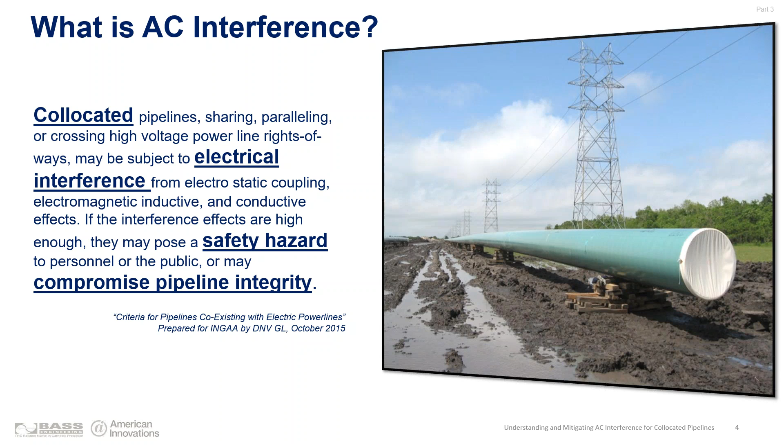Session one earlier defined specifically 3 types of AC interference. Capacitive AC interference - this is the effect of an isolated pipeline sitting on a wooden skid during construction, where the metal in the pipeline becomes a conductor and you've got charge voltage being generated on the pipeline. Your construction guys, your welders, know how to handle that. You take a piece of rebar, drive it into the ground, take your jumper cables, connect the rebar to the pipeline, and that bleeds the energy off of the pipe, making it safe to go about your construction and welding during commissioning of the pipe.

The second type of AC interference was resistive coupling, or resistive interference. It's an intermittent threat. It occurs when there's a fault on the power line - an abnormal or unexpected fault condition releasing energy into the environment. Typically this happens with a 60 hertz fault event or a lightning event. That energy travels along the power line down to the guy wires, into the ground, and can effectively damage your pipeline. If you also happen to be touching the above-ground appurtenances or the pipeline at that time, you get the hazard of step potential, touch potential, and the threat of that energy traversing through your body, causing injury or even death. So that's resistive and capacitive coupling.

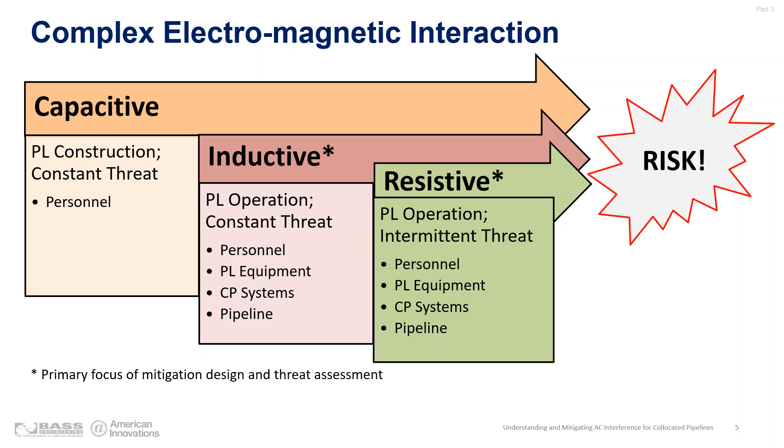And then the third type of AC interference was inductive. I'm going to hold off on this one a little bit because we're going to talk about it in great detail - inductive coupling. We're going to use this as an example for walking through our risk assessment. So session one gave a definition of AC interference and identified 3 types of AC interference.

And then happily, about a year ago, late last year, NACE came out with a standard, SP 21424, which gave our guys out in the field some guidance on standard practices and how to implement an effective AC monitoring program. And I say happily because it corroborated a solution that we, American Innovations and Bass Engineering, have been promoting for a couple of years prior to the release of that recommended standard practice.

We're really happy to see this come out in a formal recommendation from an organization like NACE. In effect, what NACE is telling you that you need to do is 4 steps, 4 high-level steps. First, you need to do an analysis, which is the equivalent of a risk assessment of all of your assets. This is to help you understand where along your pipeline you have the potential for AC interference, where all the right conditions and the confluence of events and circumstances come together to introduce AC interference along your pipeline.

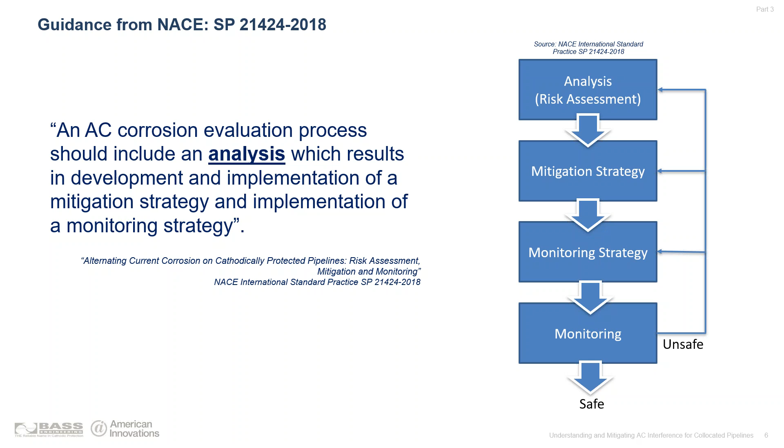So with that, let's take a break and let's do a poll real quick. Give me a second here as I navigate to the poll. And I'm going to ask you, does your company presently have a formal risk-based AC interference monitoring program?

And as people are responding, answers are coming in, if we're going to do a risk-based inspection, let's ask this question: what is risk? Risk, if you ask my 17-year-old son, he'll tell you it's the likelihood of him not getting his allowance for the year. And I'll tell him his mitigation activity is if you come in within your curfew, you get your allowance. The point of that little story is that if you ask different people, you'll get a different answer for what the definition of risk is. They generally understand that it's some kind of a loss or something bad that's happening, but you get a different answer.

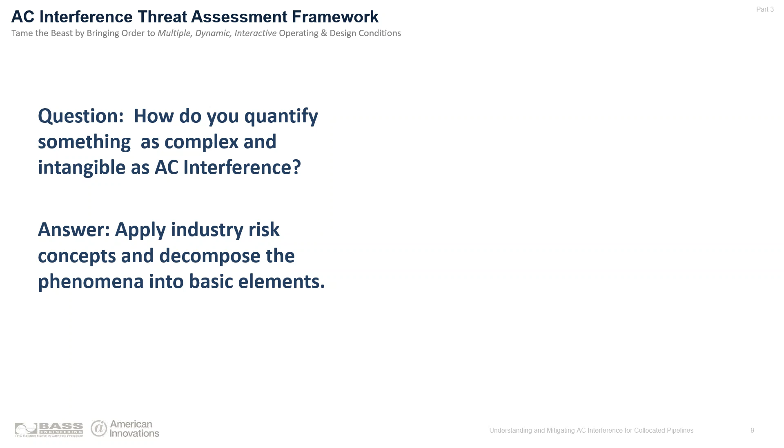So to do that, we developed a framework that allows us to basically categorize all the different components of our threat. At the highest level, we think of a threat. And we define the threat as an indication of something that is impending. In ACI, for example, step or touch potential, accelerated corrosion, and instrumentation damage. Those are all threats that you have to consider when you're doing an AC interference study.

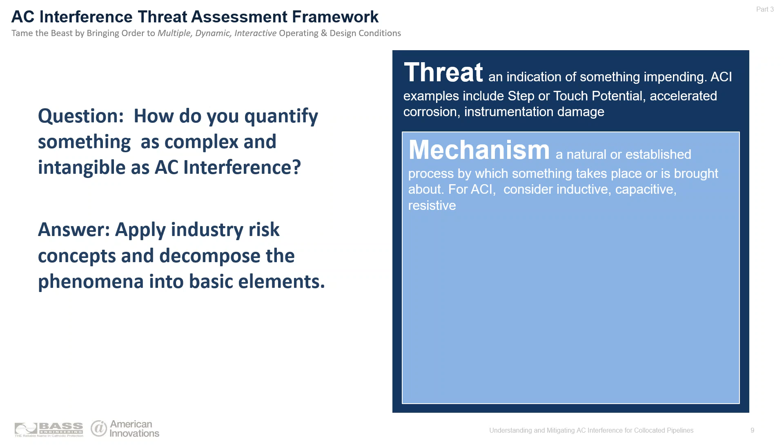If you break it down even further, then you have a mechanism. You need to understand the processes and the series of events that can occur which bring the threat to reality. So a mechanism is a natural or established process by which something takes place or is brought about. For ACI, we consider inductive, capacitive, and resistive. Those are the three mechanisms for AC interference which bring the threat to reality.

Mechanisms then can be broken down into factors, what we call threat or risk factors. A factor is something that actively contributes to the production of a result. And examples in AC interference, ACI, would include AC current density, collocation distance, and soil resistivity. Those are just a subset of several different risk factors that you would consider when you're doing your threat assessment for ACI.

And then finally, on the consequence side of the equation, you need to consider your receptors. It's a bit of a cold calculation and a cold term, but at the end of the day, you need to understand it. A receptor is an object that's impacted by an abnormal event or failure. So if that threat comes to reality, who or what is going to be on the receiving end of that event? For ACI, we consider assets, your pipelines, your instrumentation and things like that, as well as people, as receptors.

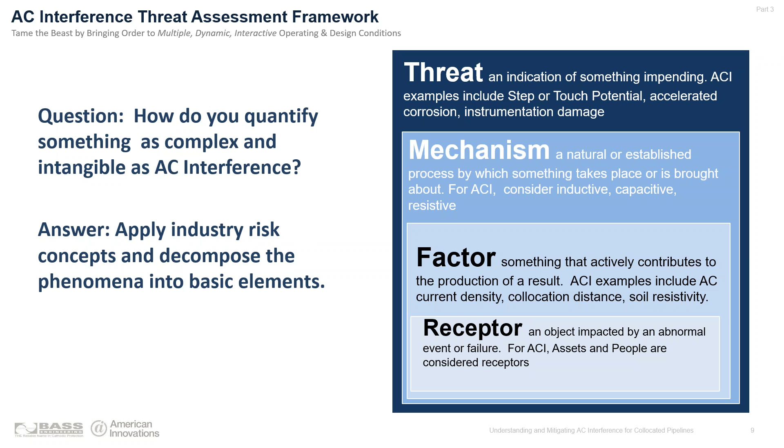So now I have a framework with which I can start decomposing this complex problem, breaking it down into an easier to understand, logical set of considerations for helping understand AC threat assessment.

So the next few slides, we're going to take our threat framework and apply it to inductive coupling. Remember now, inductive coupling is one of the mechanisms for introducing a threat to our pipeline. If you remember from session 1, we described inductive coupling as the effect of the electromagnetic field that's being generated from the power line, energizing the air and the ground between the pipeline, acting like a transformer, a step-down transformer, and putting energy onto the pipeline. Even if it's buried, there's still the transfer of energy from the EMF energizing your pipeline. So that energy, once it gets onto the pipeline, is looking for a place to discharge off of the pipeline and get down into the ground.

And so with our newer coating types, our newer technologies around external corrosion, FBE, for example, fusion bonded epoxies, well-coated pipes, very few holidays, high resistivity on the coating, there's very little opportunity for the charge to get off or discharge from the pipe. If it does find an anomaly or a holiday in your coating, then that's where the charge is going to try to discharge, and that's going to create accelerated corrosion at that point. So while we tried to mitigate external corrosion with better coatings, we exacerbated another problem with AC interference. We just need to be aware of that.

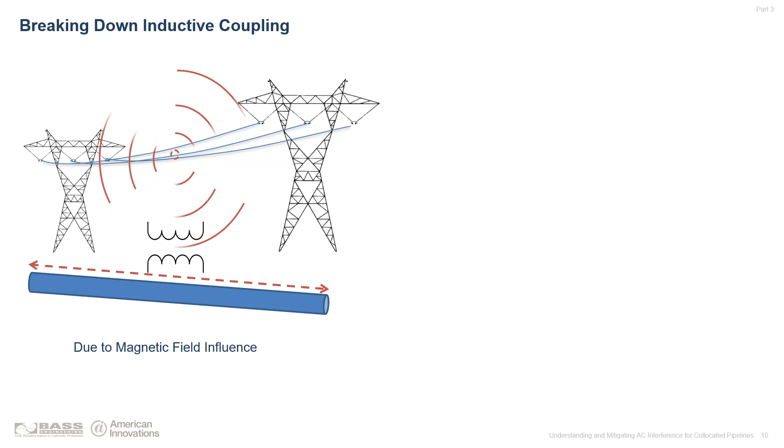So let's take our framework and apply it to inductive coupling. The threat, as we mentioned before, is accelerated corrosion on my pipeline. My mechanism is inductive coupling. My risk factors, I'll hold that thought. We're going to do a really deep dive on these risk factors for inductive coupling and explain to you what you need to consider. And then finally, the receptor in this case is the pipeline receiving accelerated corrosion. So I've got my framework. I now know what I'm going to address.

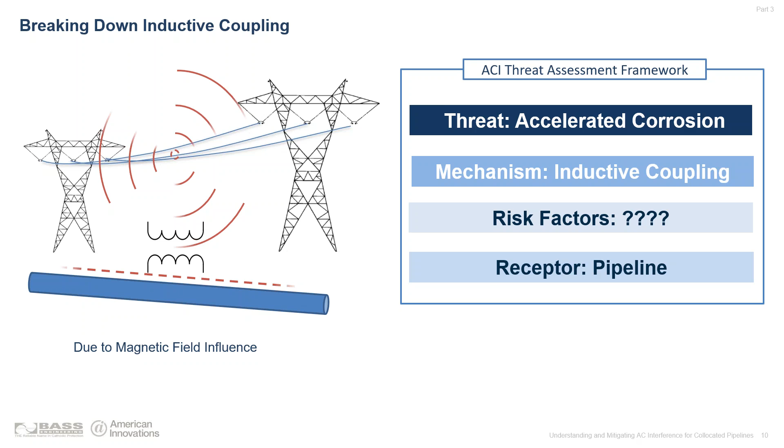Let's start looking at, well, before we do that, let's go back and do a poll real quick. Let me bring out the poll. I'm going to ask, have you ever experienced AC corrosion on your pipeline? How many of you out there have actually seen accelerated corrosion due to inductive coupling on your pipeline?

The results are coming in. Looks like about an even split here. About 50% of you say yes, you experienced it. 50% of you are saying no, you've not seen it on the pipeline before. So interesting split. About half of you have seen it. You know what to look for when you're out on the right of way. The other half of you are saying no. Appreciate your time there. Very interesting. So let's close out our poll and get back to our presentation.

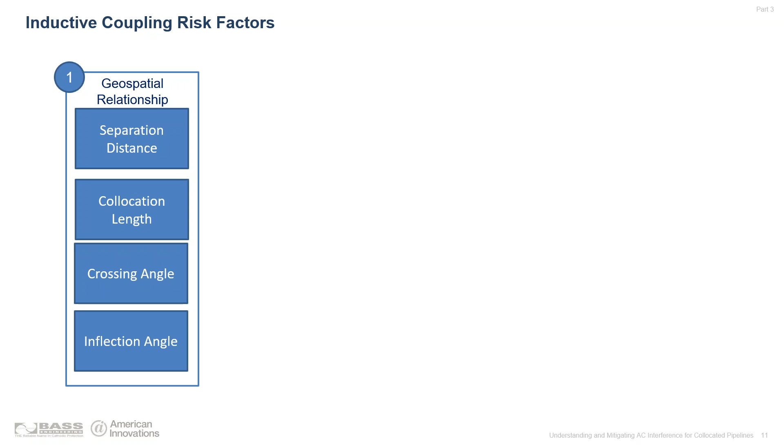Oops, sorry, wrong button there. So let's talk about risk factors. For this example, we're going to be grouping all of the risk factors for inductive coupling into 4 buckets. Our first bucket is the geospatial relationship of the power line to the pipeline. The 4 factors that we're going to look at are the separation distance, the co-location length, how much of that metal is exposed to the EMF field, the crossing angle of the pipe to the power line, and then what we call an inflection angle, or the bend in the pipe. We'll talk about those in greater detail a little bit later.

And then the other bucket is the power line operations. If you have your HVAC current, and you can get that information for the power line that you're co-located with, that's the data that you probably want to use in your threat assessment. For those of you who have ever tried to call a power company and ask them for that data, once the power representative stops laughing at you, he's going to ask you for a check, and he's going to ask you to come back in 6 months. So you're not going to be able to get that data easily unless you're a large distribution company who happens to be distributing both electricity and gas.

If you're lucky enough to be able to get the HVAC current data, I'd suggest you use that data. You could use, however, HVAC voltage as a proxy, because there are some third-party data sets available that you can purchase relatively cheap that show you the center lines of the electrical transmission power lines, and they give you the voltage ratings on those power lines.

So you need to use one or the other, voltage or current, but don't use both, because then you're double dipping in your risk modeling. Pick one and use one or the other.

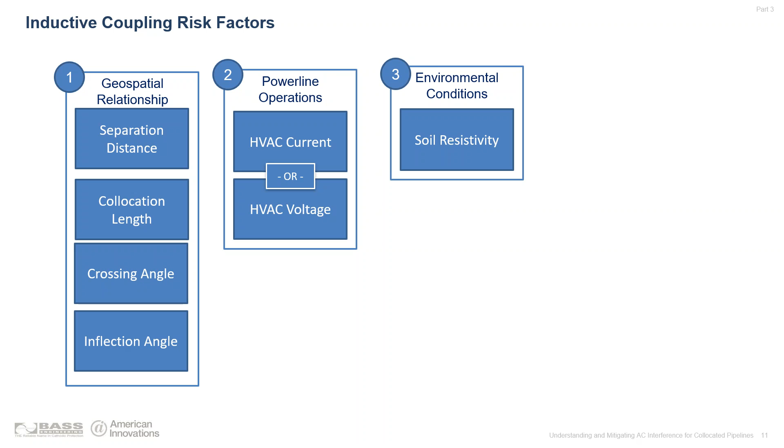Once you have your power line operations, the next bucket you want to consider is your environmental conditions. If you've ever talked to a corrosion guy about CP and corrosion, the first thing they're going to ask is soil resistivity. Just like external corrosion management, soil resistivity plays an important risk factor in considering AC current density, or AC interference.

And then finally, the design of the pipe is going to be a critical risk factor. So there are several critical risk factors you need to consider in your threat assessment. Most importantly, your coating resistance - and we'll talk about how we create a composite risk factor using the coating condition, the coating age, and the coating type. And then finally, the pipe diameter can play a role in your risk assessment, or threat assessment, as well.

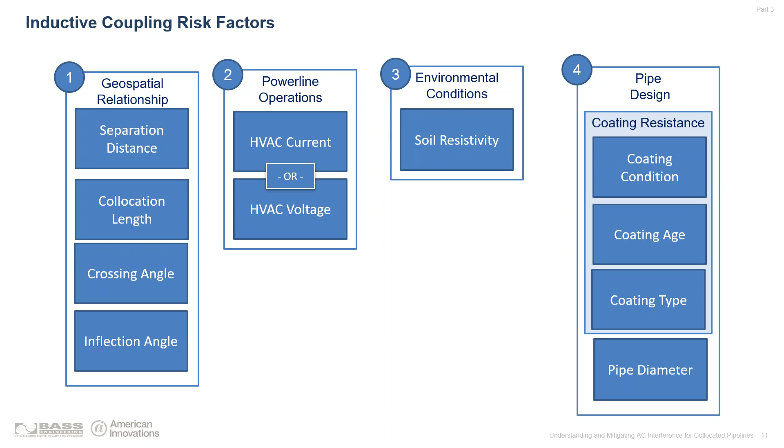So this is not a comprehensive list of everything you might want to consider for your AC interference, but we're going to walk through these risk factors, show you how we would put them into a risk-based inspection or risk-based threat assessment, and then you can take those same concepts. You'll see a pattern developing over time - take those same concepts and apply them to other data you might want to bring into your threat assessment.

So let's walk through a real live example. When I first started putting these presentations together, I saw this picture and quickly knew I had all the right ingredients in one image to explain inductive coupling and AC interference. The first thing I noticed were these steel lattice towers - considerably large structures. So it's a pretty safe bet that power line is carrying...

...is built to carry a pretty big load. So we're going to assume, just for this example, that this is a 500 kV HVAC power line - a pretty powerful energy structure, source of energy out there.

This is also, for the sake of this argument, let's assume this is a transmission pipeline. The main line is carrying an HVL - it's a Y-grade NGL pipeline, so it's an HVL product. We've got the transmission line coming into a yard here, the main line coming into the yard. Looks like there might be some traps and valves, some above ground appurtenances inside of the yard, and then the suction line coming into our pump station.

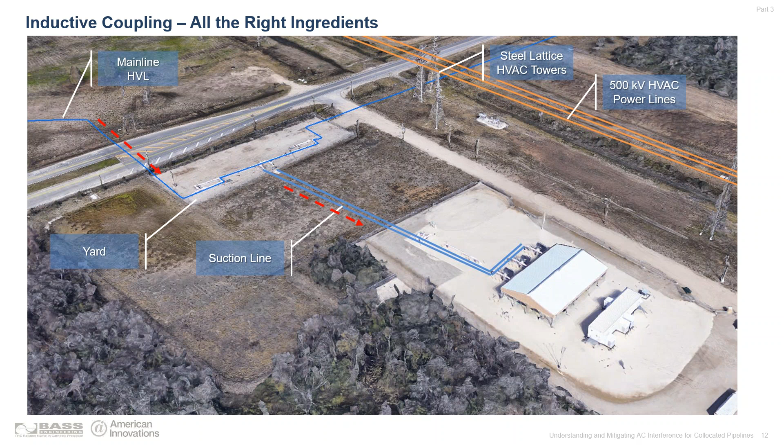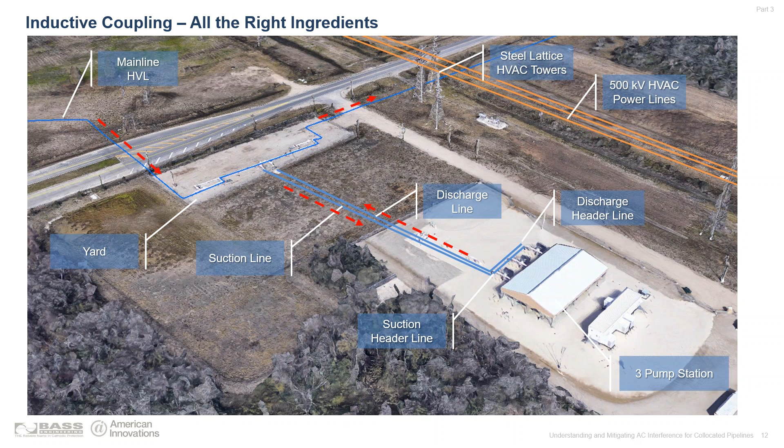Our pump station - we actually see 3 pumps here. We have our suction header lines, our discharge header lines coming back out to our discharge line, and then back out onto the main line, pushing the product on down the line. So this is going to be the scenario where we're going to walk through the potential for induced AC interference, inductive coupling, on these assets in this particular image.

For those in the corrosion world - the corrosion world and the integrity world, the inside dogs and the outside dogs - they talk different languages. We look at our assets differently. For the sake of this example, we're going to use the terms the integrity management group tends to use. I know you guys in the corrosion group, your corrosion techs, tend to refer to your pipelines as right-of-ways and mileposts and things like that. Your integrity group and your GIS group will refer to your pipelines in segments, or pipeline segments or routes.

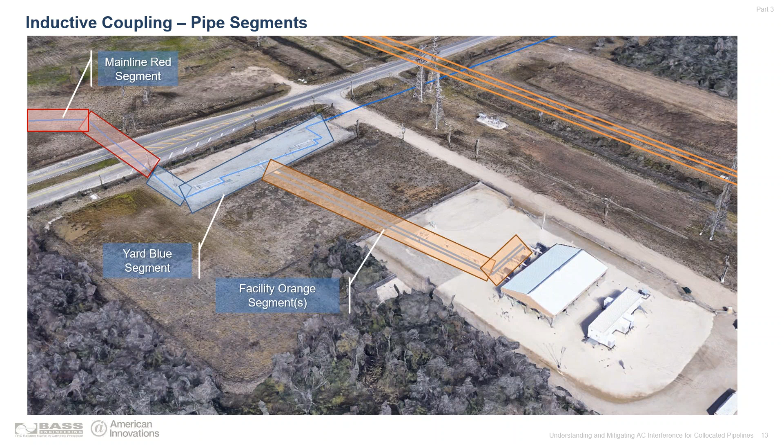So just to level set everybody, in this example we're going to use the term the integrity managers use. We're going to say the first part of our little segment here is the red segment - our main line is the red segment. Everything inside of the yard we're going to call the blue segments - everything from the yard into the pumping facility. We're going to call the orange segments the piping in the facility, and then back out on the main line again, we're going to call that the green segment. So it's not unusual for your integrity group to break your pipelines up into segments that help them manage the data a little bit easier.

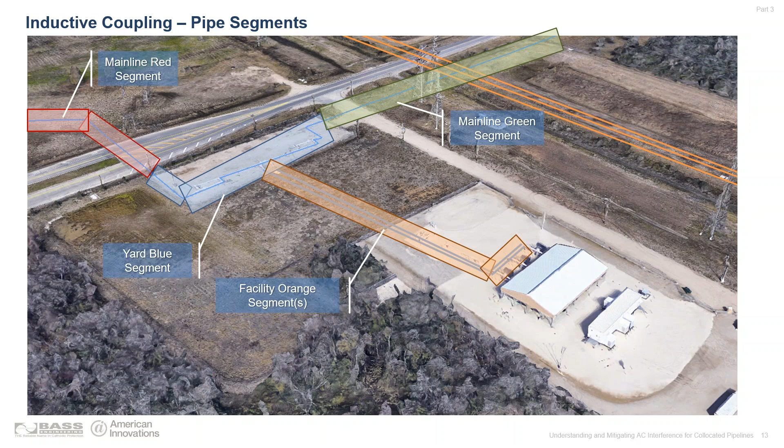So let's get started. The first thing we're going to do—and when I say 'we,' just understand that we actually did this for a customer. This was the approach that we took, and this is how we implemented our AC interference threat assessment for them.

Our GIS team got the center lines for our pipeline from our customer, as well as the center lines for the power transmission from third-party data sets. And then we merged those data sets together.

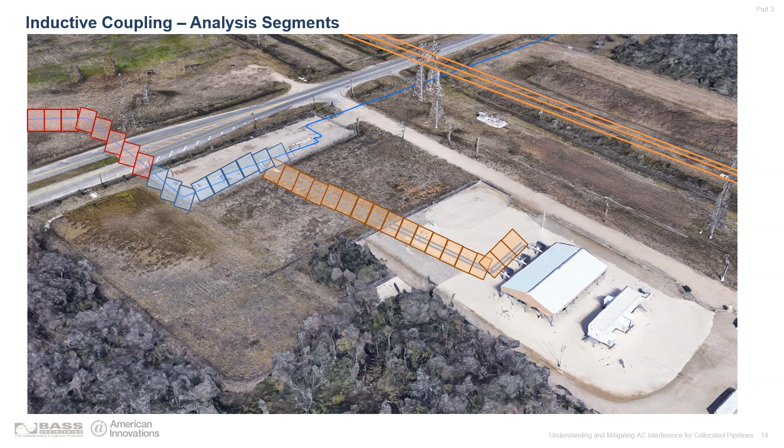The first thing that we did is what we called dynamic segmentation. We divided each of the pipeline segments up into smaller 25-foot segments. You can see here—again, this is not to scale, and this is not our actual customer. It's all obfuscated, but it does demonstrate the principles we used for the actual threat assessments we do for our customers.

So each segment of pipe is divided into 25-foot segments, what we call analysis segments. Then we apply our risk threat framework to each of those analysis segments to come up with a risk score for each one—how risky is that little 25-foot segment of pipe, using our risk factors and threat assessment framework?

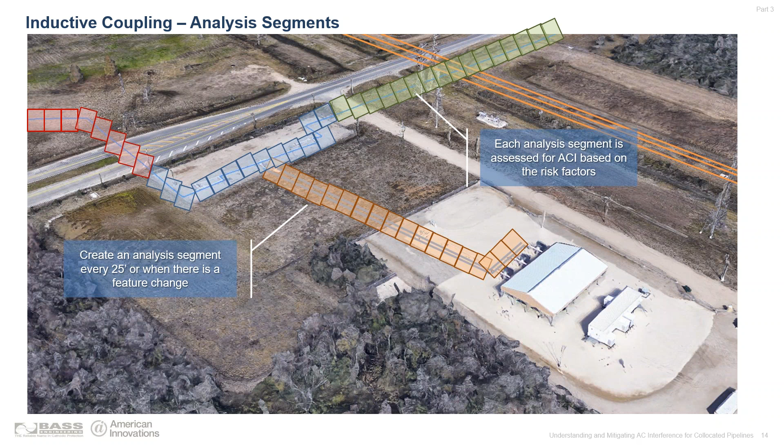Okay, so those are the terminologies we'll be using for the remaining slides. Again, each analysis segment is assessed for ACI based on the risk factors we defined earlier. So let's start walking through our scenario here and applying our threat assessment to our facility.

You see the bucket here—these are geospatial relationships. We're going to talk about separation distance. Every risk factor is given a conversion table down here. This first column represents the actual value of that risk factor for that 25-foot analysis segment. Then, to make it easy to talk about, we assign a high, medium, or low risk score. But based on the instance value of that particular risk factor, we give it a risk score on a scale of 1 to 5, or 1 to 6—there's a reason for that based on the supporting documentation we read.

So, 0 to 5—the higher the risk score, the riskier the asset. No surprise, in the case of separation distance: the distance between a point on the pipeline at a right angle with the power line—the closer the pipe is to the power line, the higher the risk.

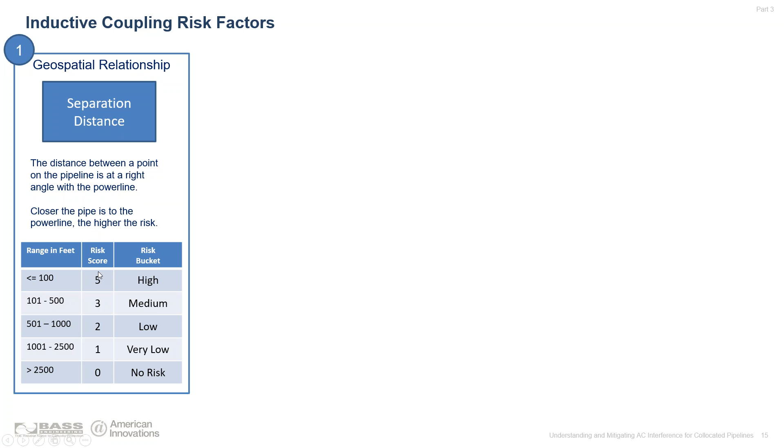Alright, let's take a look at our scenario here. We're just going to take one analysis segment, the orange one, randomly chosen right there in the middle. Starting at the middle of that 25-foot analysis segment, we measure the distance to the right angle of the power line, that 90-degree angle. That comes out to 450 feet.

So you're saying, Andy, do I have to go out into the field and measure the distance every 25 feet along my pipeline? You do not. If you have a good GIS team, they can do this for you—there are Esri tools or other GIS tools available to do this on the computer, through automation. If you don't have a GIS team, give me a call. I've got some really smart GIS folks on staff who'd love to help you.

In this example, from this analysis segment to the power line, it's 450 feet. So I go to my conversion table and see that 101 to 500 feet is a medium risk, so I give that risk factor a score of 3. Then I do the same thing for the blue segment—again, from the middle of that analysis segment to a right angle at the power line—and I got 375 feet. Our GIS team measured that using their GIS tools.

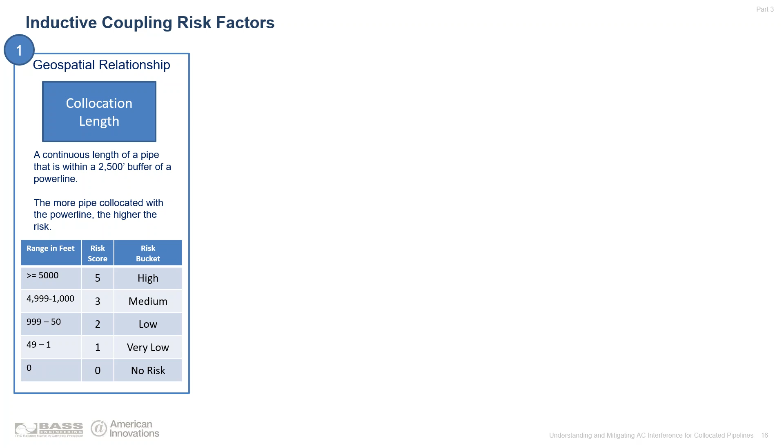Let's talk about how we would look at co-location length for my scenario here. We're going to take a little different approach on the analysis segment. Because we're talking about contiguous lengths of pipe, we're going to look at the entire length of the pipeline segment, then apply that to the individual analysis segments. For example, our red segment coming into the yard here is 1,800 feet in length, within the 2,500 foot buffer. So I go look at my conversion table and I see that 4,999 feet to 1,000 feet of co-located pipe is a medium risk, so we're going to give that a risk score of 3. Every red analysis segment will get a score of 3.

200 feet of contiguous pipe within my yard - looking at my conversion table, it's a lot less metal being exposed to the magnetic field, so I'm going to consider that low risk, given a risk score of 2. Every blue analysis segment in our analysis will be given that low risk score of 2. Same thing, 900 feet for the orange segment, but low risk, so every orange analysis segment gets a score of 2.

The green segment stretches across on either side of the power line, so we're going to consider the first 175 feet plus another 2,500 feet on the other side of the power line. So I've got a total of 2,675 feet of contiguous pipe in the buffer exposed to the EMF. Looking at my conversion table again, that falls into this criteria here - it's a medium risk, and every green analysis segment will be given a risk score of 3 for the co-location length risk factor.

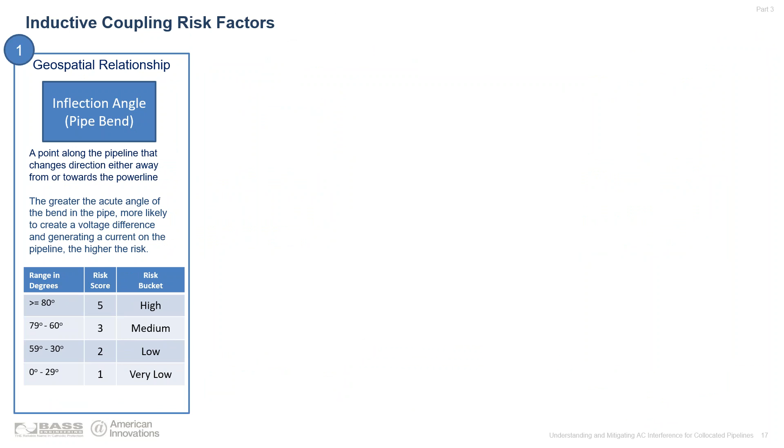Now I'm starting to see a pattern here in how we're applying our risk scores to our risk factors. Let's talk about the inflection angle, or what we call the bend in the pipe. If you think about it, you understand that if there's a change in the direction of the pipe, or a change in the exposure of the pipe to the EMF on either side of the bend, what you're doing is creating a voltage potential difference. And when there's a difference in voltage potential, current starts moving, and the likely place for that current to discharge is at those bends in the pipe out here.

We're paying special attention to whenever there's a change in the direction of the pipe. Looking at our little red segment here, we see a 45-degree bend in the pipe right here, and then in that previous analysis segment, there's no bend. To show the difference in scoring, this first analysis segment has zero degree change in pipe, so I look at my conversion table and say the risk of that is very low.

It's not no risk, there's still risk, but it's very low. But I've got a change in direction in my pipe, a 45-degree bend here. So I go look at my conversion table and see if it's between 59 and 30 degrees, I've got a low riskiness. Therefore, I'm going to assign a value of 2 to my risk score for that particular analysis segment.

I'll repeat that for every bend in the pipe. Once I get into the yard, it gets pretty busy. I've got a 90-degree angle here, 2 90-degree angles here, and 4 90-degree angles right here. So I'll go look at my pipeline and again my little conversion chart. I see that when I have a change in direction of 80 degrees or higher, that's high risk.

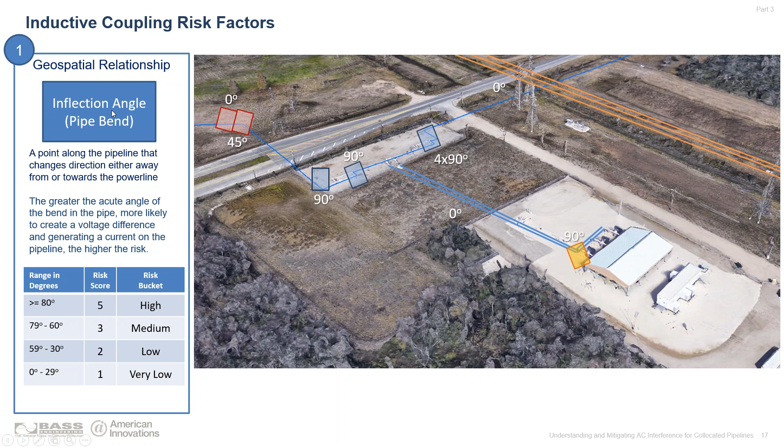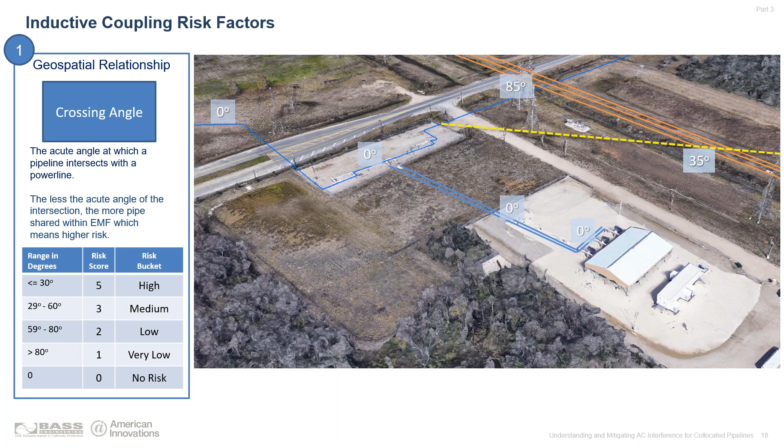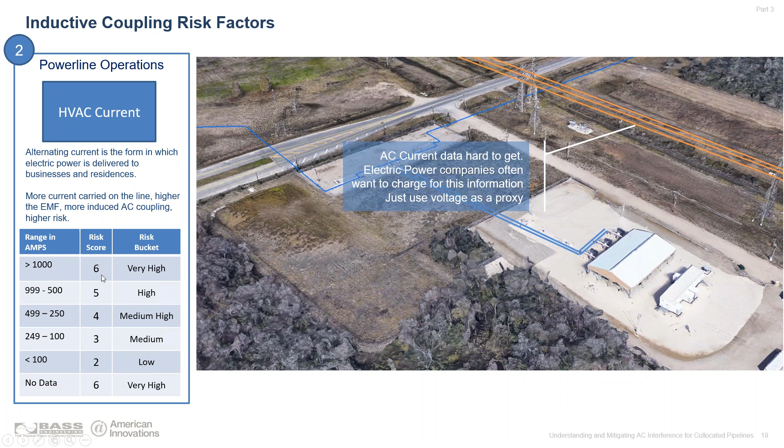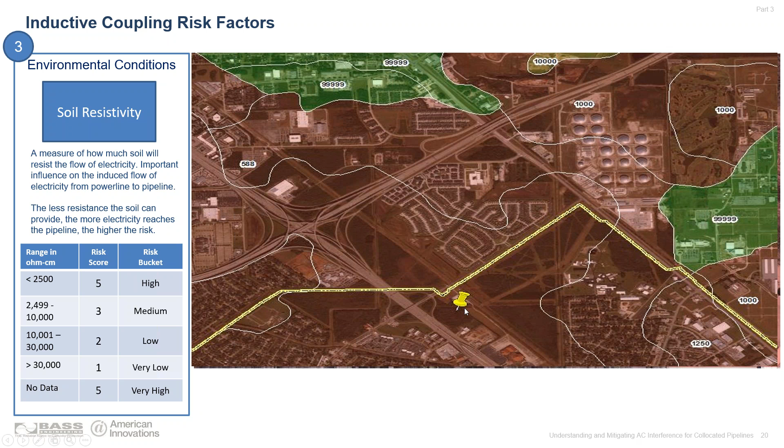So if I look at that, I can see that the actual calculation we came up with was 600 ohm centimeters. If I go over and look at my little conversion chart for soil resistivity, the lower the resistivity, the less resistance to soil, the higher the risk. So I've got 600 ohm centimeters—that's pretty low resistance. Our conversion table tells us if we're less than 2,500 ohm centimeters, we're at high risk. Therefore, every analysis segment in this example is going to be given a risk score of 5.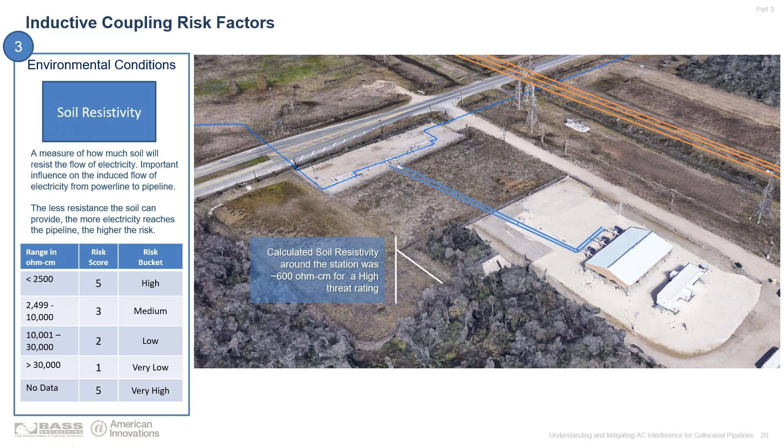Okay. All right. Now let's talk about inductive coupling risk factor for pipe design, and in particular the coating resistance. As I mentioned earlier, if you have a high resistivity on your pipeline due to your coating, then you're keeping that charge on the pipe, and that charge is looking for somewhere to discharge and get off of the pipe and into the ground.

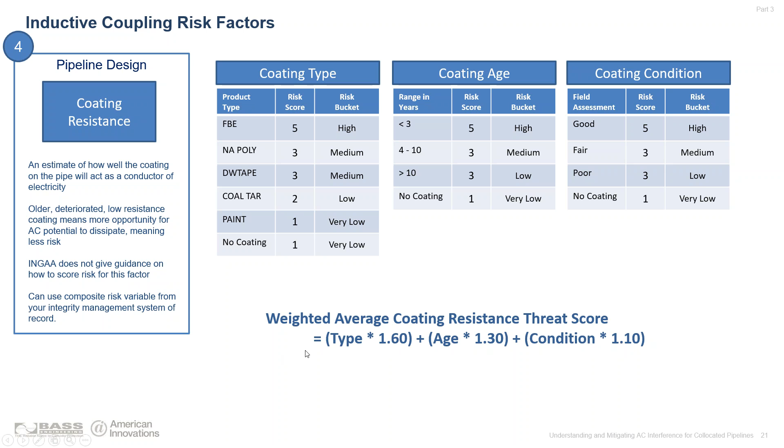I say it's a composite risk score, so I'm trying to take all three of these variables and combine them into one variable, so that it simplifies our analysis. But I might rely on coating type a little bit more than the subjective assessment of my inspector out in the field. There's some very clear documentation out there about coating types and how you should consider the risk of those coating types. So I'm going to rely on coating type a little more than coating age and coating condition. We can do this by weighting the values of those variables. So type times 1.6, age times 1.3, and condition times 1.1. And bring all that together to get a coating resistance for a particular analysis segment.

So let's go back to our example, coating resistance. I have my red line coming in. It's FBE coated in 2007. It's in fair condition, so it came up with a composite score of 19. If I look at my conversion table, 19 to 15, it's a medium-high score, and therefore all the analysis segments in this particular pipeline segment will be given a risk score of 4. Now there is a concept of dynamic segmentation. Let's say my coating changed from here to here, then I would create another pipeline segment. But for this example, our pipeline segment and all the analysis segments apply to this particular stretch of pipe right here.

Going further into the example, let's say my facility piping was DW tape installed in 2010. It's in fair condition, so based off of our composite variable, we got a score of 16. Again, I'm looking at my conversion table. A score of 19 to 15 means medium-high. Therefore, all the analysis segments in the facility piping will be given a score of 4.

Similarly, coal tar, older stretch of pipe out here, installed in 1972. It's in poor condition. It's coal tar. It's old technology, lots of holidays, lots of opportunity for that energy to get off of the pipe. Therefore, my composite risk score comes up with a score of 3, and based off of our conversion table, less than 3 means very low. So all the analysis segments in my green segment will be given a score of 1.

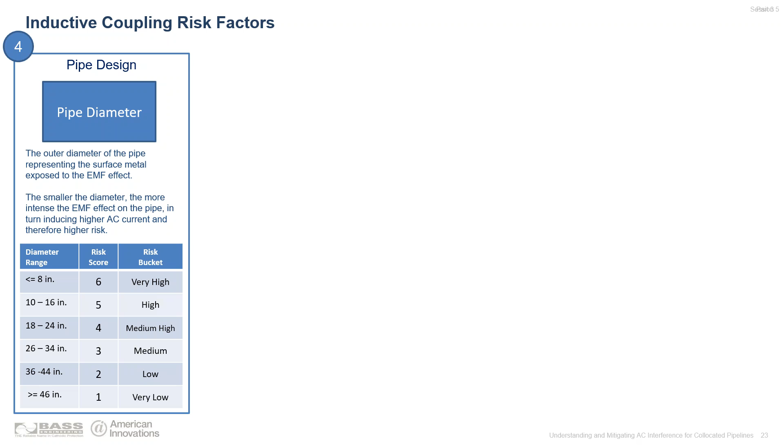And again, read the documentation if you want. It's almost an afterthought or a footnote to consider pipe diameter as part of your threat assessment, but it's mentioned, and you can certainly incorporate it into your threat assessment if you want.

So if I look at my ongoing scenario here, I've got a 24-inch line coming into my pump station. 18 to 24 inches is considered a medium-high risk. So all the analysis segments along the orange segment here will be given a risk score of 4 for their risk factor. 20-inch main line coming into the yard, 20-inch again back out on the main line of the green segments. Same thing, 18 to 24 inches. Medium-high risk, give it a risk score of 4.

Okay. So now I've gone through all of my risk factors. I looked at their current values, their current state, and I assessed them for their riskiness by giving them a risk score. The higher the risk score, the higher the potential for risk. I know a lot of you are probably asking, how come you go 0 to 5 sometimes? Sometimes you go 0 to 6. Sometimes you go 1 to 5.

Wherever possible, we relied on existing documentation where they gave us the criteria, and we tried to leverage that criteria. We found that different documentation gave us different standards. If we couldn't find documentation, but it was mentioned as a risk factor, then we just evenly spread out the buckets over a 1 to 5 range. So you do get a different range of risk scores for each risk factor, but that's not really important because we're just trying to compare risk for those analysis segments for that risk factor. We're not comparing them across different risk factors.

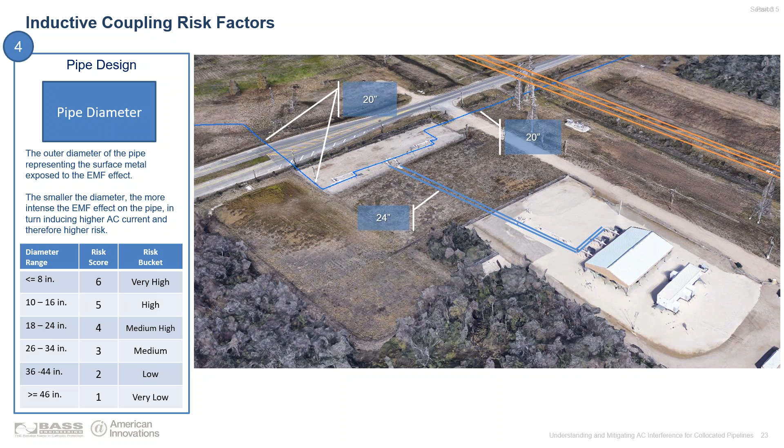So what I'm going to do next is bring it all together into what we call a relative threat score. Essentially I'm going to take all of those risk factors that we assessed and sum them up for each analysis segment. So all the risk scores for those risk factors are summed up for that particular analysis segment, giving me a score for that little 25-foot stretch of pipe for how risky that particular analysis segment is.

Well, that's good, but you're not going to go out and look at just 25 feet of pipe. What we're going to do next is take the average of all of the risk scores for those analysis segments across the pipeline. So if I take my risk scores for all the analysis segments in the red segment, I get a 26.34 risk score. Same thing for the blue segment in the yard, I get a 26.91.

That's my average risk score of my analysis segment: 24.39 for my orange segments, and 26.58 for my green out there. So now I understand at a high level what segments of pipe are at the highest risk, and if I wanted to drill down into those particular segments, I could get down to the 25-foot analysis segment to see what particularly is driving that risk score for that particular analysis segment.

So not surprisingly, the blue segment with all of the changes in directions and the bends in the pipe came out as the segment of pipe at highest risk. So what I'm going to do then is dispatch the outside dogs. I'm going to pick up the phone, call Jordan, my field crew, and say, hey, you guys need to go out and do a field assessment at the yard there. Take a look around. Take your portable reading devices. Get me some AC current density readings out there and see what's going on and see if we need to mitigate them. Okay.

So now I've got my crew. I got the outside dogs. I got them in the right location to go out and see if there's a threat on the pipeline. And Jordan and his outside crew are very thankful because they don't have to be walking the entire right of way, taking AC current density readings. They know exactly where to go in the 100-degree heat in Texas out there.

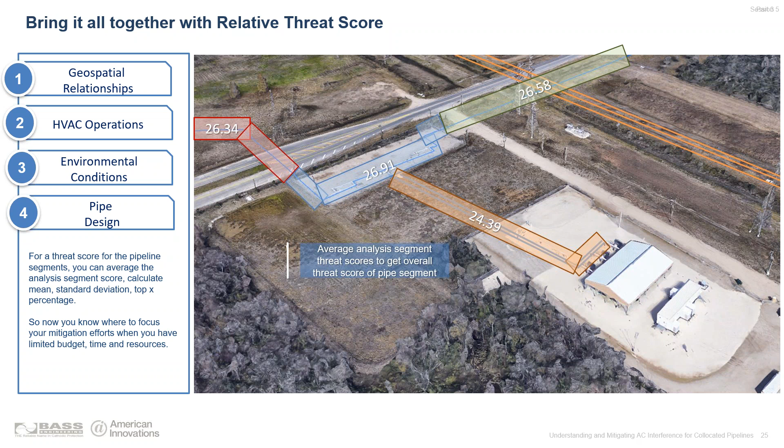The risk factors that I showed you earlier are a subset of many different data sets, and your integrity team probably does have this data. If you want to incorporate these data sets into your threat assessment, I'd highly recommend that you do it. If you have your inline inspection results, your pipe tally for your ILI runs, lay that into your co-location buffers there. And if you've got a bunch of anomalies, external wall losses called out in close proximity to a power line, if I were a betting man, I would say it's probably induced AC corrosion going on there. Induced coupling and accelerated corrosion, I apologize.

Your cathodic protection system, how effective is it? If you can get that data: you may still have corrosion going on your pipeline, but if you got a CP system on there that's effectively mitigating it, then you'd want to consider that as well. Close interval surveys, you're out there detecting holidays on your pipe and the coating. Again, if you have a few holidays in a very close location on your pipeline, you might be thinking about inductive coupling and accelerated corrosion.

You did hear me talk a little bit earlier that the single most important indicator that you do have AC induced corrosion is AC current density readings. If you have those test stations out there and you have that information available, then by all means put that into your threat assessment as well. This example that we walked through here was assuming that you were starting from scratch and you didn't have a monitoring program, you didn't have any test stations, and you weren't collecting this data for AC current density. But if you have it, by all means bring it into the equation, the modeling up there.

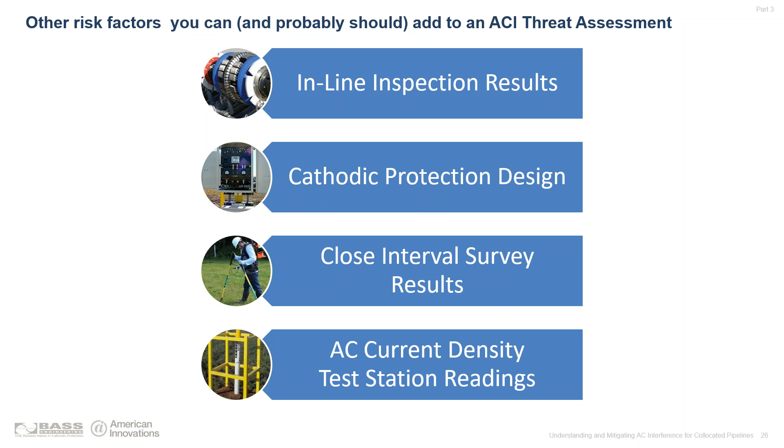Okay. So there's, again, AC current density. Here's an example of a coupon that you'd put out next to your pipe. It's a Triton coupon. We sell this. But if you're like me, I'm an inside dog. I'm going to put an RM4210, a remote monitoring unit, on top of it so that I don't have to go out into the field, and from the comfort of my desk, I can actually get some real-time readings of the AC current density on my pipe.

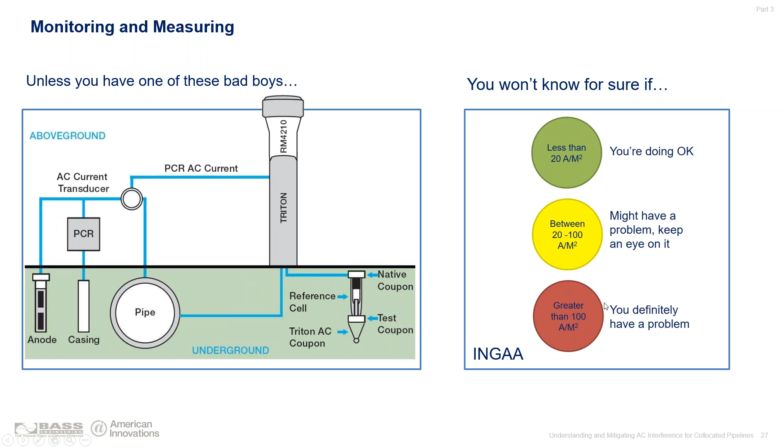INGAA will tell you that if you have AC current density of 100 amps per meter squared or more, you definitely have a problem. You might have a problem if it's between 20 and 100. You've got no problem, or you're doing okay, if you got less than 20 amps per meter squared. NACE came out with another set of criteria. It's not listed here, but in the NACE SP document that I talked about earlier, there's a correlation between the DC current and the AC current in the field. So if you're collecting both DC current and AC current with your coupons, you can come up with a criteria to see whether you have a problem or not as well.

Hopefully with the framework and the risk factors, and showing you how to apply those risk factors, I've given you a foundation for implementing a solid AC interference continuous assessment program. A program is a set of projects that you do over and over again that benefit from managing them together. Think of your CP system, your CP close interval surveys as a program, your ILI as a program, and now you've got an AC continuous assessment program. When the auditors at PHMSA come knocking on your door and say, show me what you're doing for AC interference, you can show them that you've got a well-defined, defensible, logical approach to monitoring AC interference.

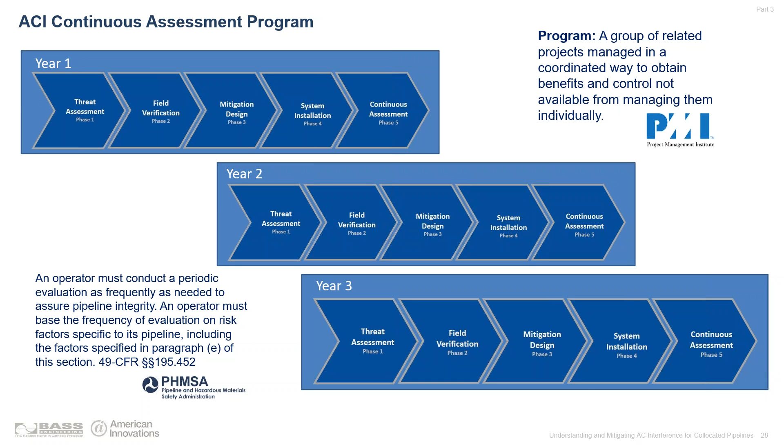So with that, I'm going to wrap it up and see if there are any questions here. Let me open up my dialogue and read through the questions. There is one here, but I can't quite...

The question is: how do you convert the data from the USGS to get the soil resistivity? Very good question. It's a real simple algorithm, but I don't have the equation with me right now. I'll reply to that in an email. Again, the USGS SSURGO data set gives you conductivity, and you apply a little conversion formula to get the soil resistivity out of it. So Kirby, thank you for your question, we'll get that to you in an email response. Apologies, I don't have that equation on hand right now.

Are there any other questions here? Let me see. There is, but I'm having a hard time reading it. Let's see here, here we go.

The question is: unless the pipes are isolated at each joint or spot, why would you not consider the pipe as a contiguous link? That's a good question, we'll go back and research that one as well. We haven't really thought about isolation along the pipeline. We were coming at this initial threat assessment with the data available at the time, and all we had was the pipe center line and the power transmission center lines. We didn't have any isolation points along the pipeline, but certainly if you have that information, you can consider it as part of the contiguous segment. Your GIS team could incorporate that easily enough.

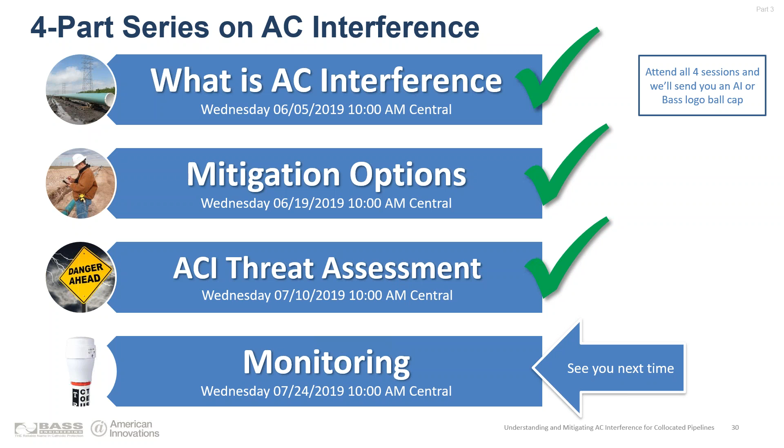I did run over a lot of material, and we covered this at a high level. There's a lot more to cover in AC threat assessments, but I appreciate your time. Hope you found this informative, and I look forward to seeing you in about 2 weeks. So thank you, everyone.